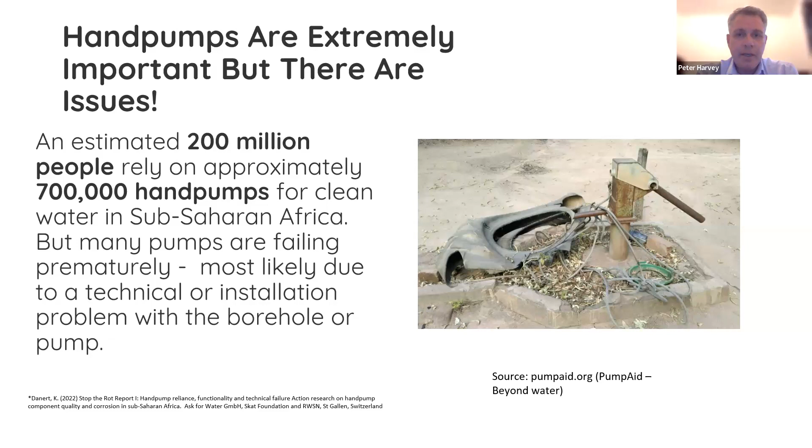And the idea of the Stop the Rot initiative was to document the scale and extent of rapid hand pump corrosion, as well as the use of poor quality hand pump components in Sub-Saharan Africa, and ultimately, therefore, to bring about actions to address these specific problems.

Now, the issue of corrosion and poor quality components are interlinked, and overall they contribute to poor hand pump performance, rapid failure, poor water quality, and often resulting in either hand pumps not working and abandonment of those sources, or long periods of downtime where users are unable to access water through the hand pump.

So this is not a new issue. We've known about these issues for many years, but it seemed that it had come off the agenda, and that we were talking about the social aspects of community managed water supplies, for example. We were talking about the systems and services that were required to ensure that hand pumps keep functioning. But the technology piece of it sometimes got put to the background.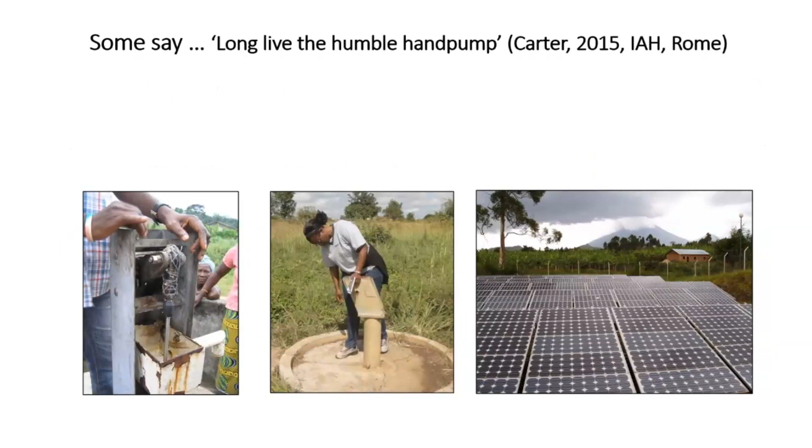In 2015, I presented a paper at the International Association of Hydrogeologists conference in Rome, entitled Long Live the Humble Hand Pump. I drew attention to the view that was becoming more common, that hand pumps in rural Africa and Asia have had their day. They're too difficult to manage, and pumping should use solar energy, which is getting cheaper and cheaper, and furthermore, our ambition should be piped, treated, and household connections for everybody.

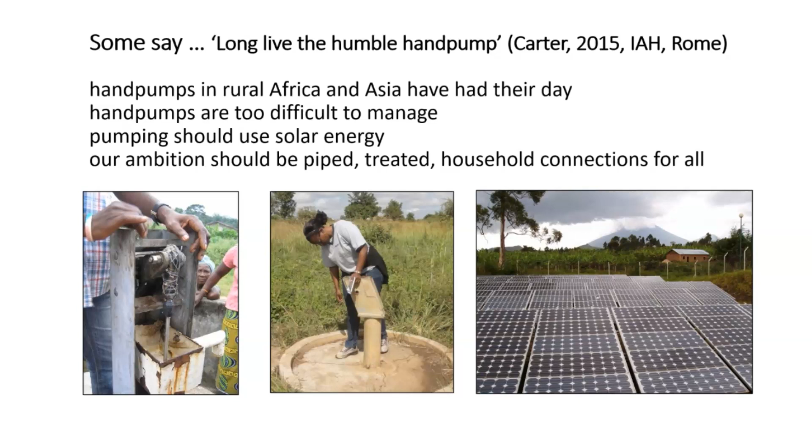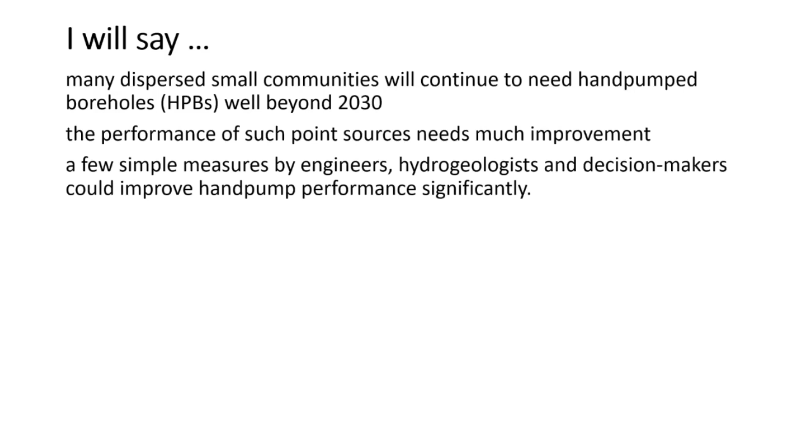Now I'm going to say something a little bit different: that many dispersed small communities will continue to need hand-pumped boreholes, well beyond 2030, the end of the SDG period, perhaps for another two or three decades even. We do know that the performance of such point sources needs a lot of improvement, but a few simple measures by engineers, hydrogeologists and decision makers could really improve the performance of hand pumps very significantly.

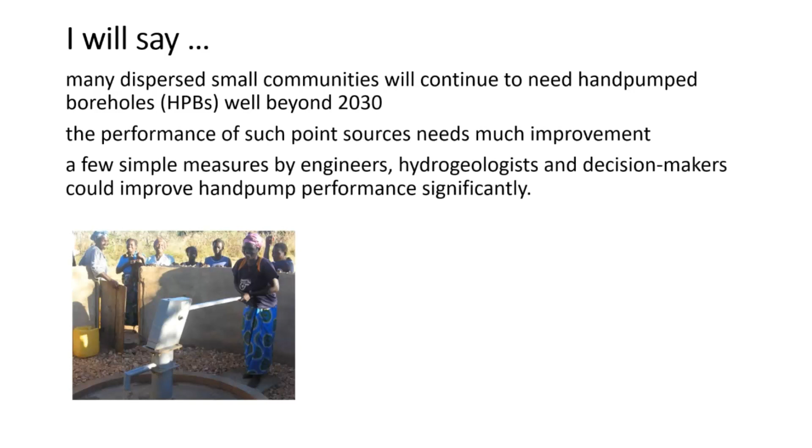A hand pump here in Zambia provides a basic water service for the community, but it is prone to breakdown. Reliability is an issue, functionality is lower than we would like to see. So we do need better pump designs and quality control of the manufacture of hand pumps and the manufacture and supply of spare parts. Of course, it's one thing to have a design, it's one thing to have better quality control, but we also need to see adoption and uptake of any improvements that are made.

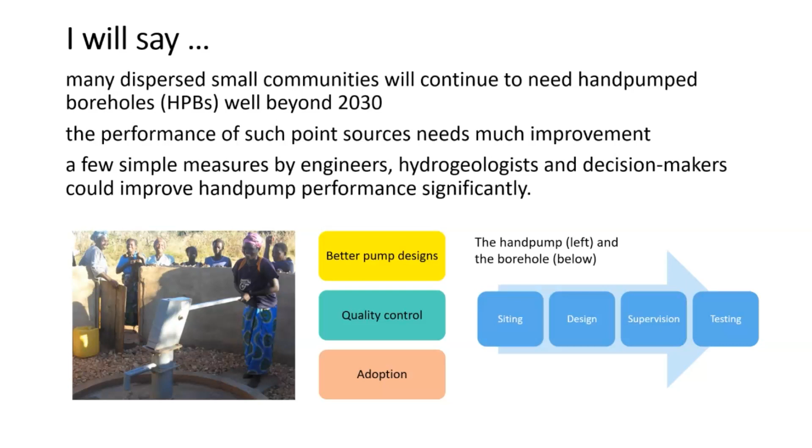And that all needs to be set in the background of improvements to the siting of boreholes, the design of boreholes, the supervision of construction, and then the completion, the testing, and so on that follow the completion of a borehole. So improvements to pump designs fit within a wider ecosystem, which involves not only the pumping technology, but also the borehole and the groundwater resources on which that borehole depends.

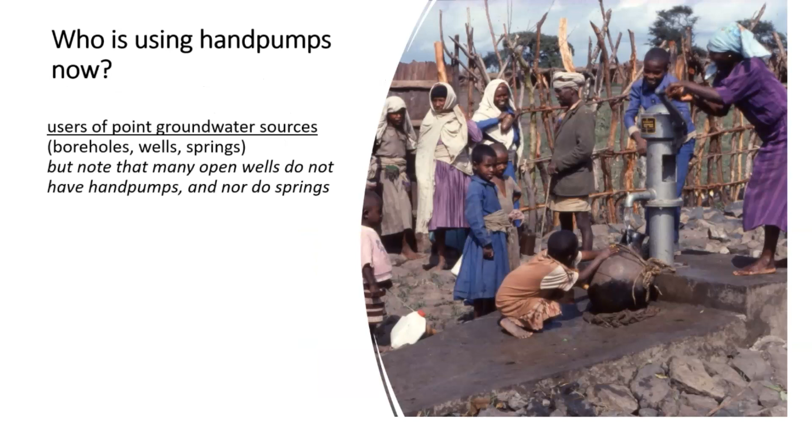Who's using hand pumps now? Well, the obvious place to start is people who use point groundwater sources. In the publicly available data, what that refers to is people using boreholes, wells, or springs. But of course, many open wells, many springs don't have pumps of any sort. So we need to narrow down the focus a little bit. Users of boreholes and protected wells, well, again, users of both those sources may include motorized pumps, and a protected hand dug well may use a windlass and a bucket rather than a pump.

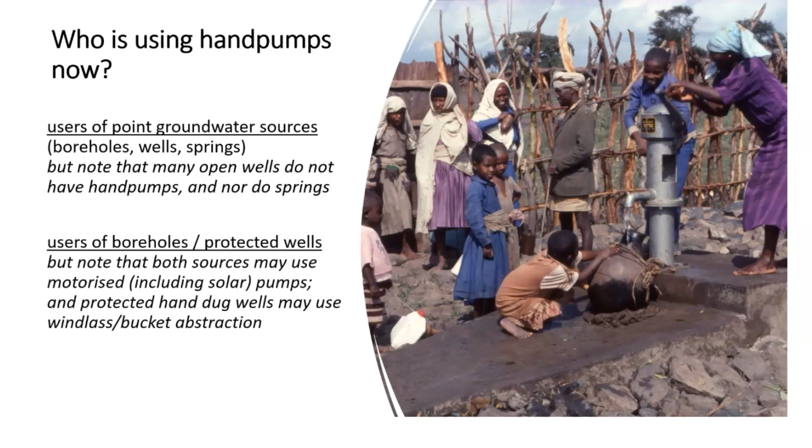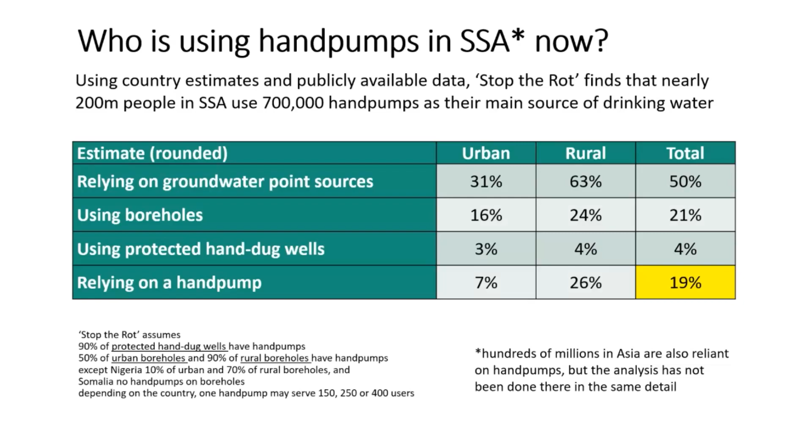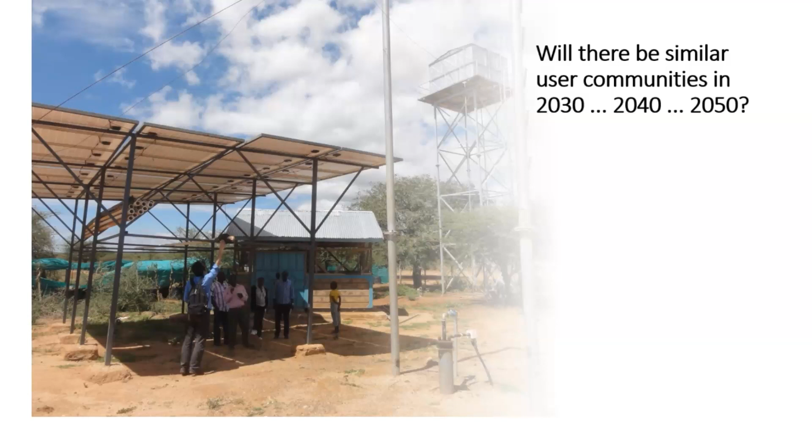Now, the question is, will there be similar user communities in 2030 at the end of the SDG period, in 2040 and beyond? Of course, there's the trend towards piped systems, treated systems, solar pumped systems, such as the one in the photograph here in northern Kenya. There are obvious issues associated with a transition to these sort of technologies, and cost and management are the two primary factors that need to be taken into account.

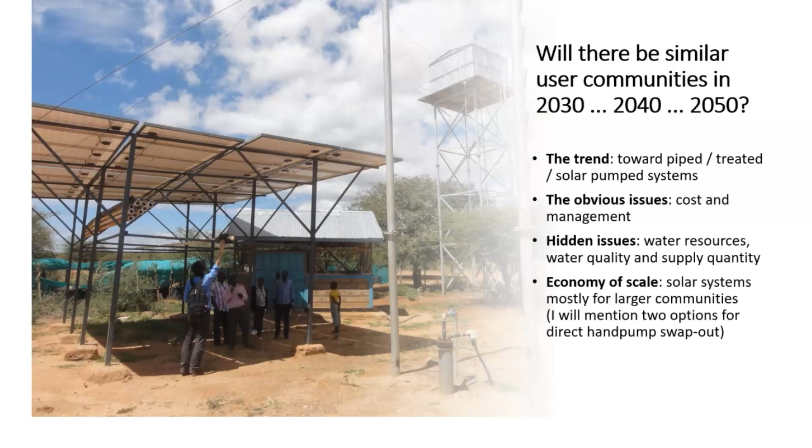But there are hidden issues too about water resources, about the consideration of water quality and supply quantities involved. There's an issue of economy of scale too. Solar systems are often most cost effective for larger communities, although in the next slide I'll mention a couple of options which can result in direct swap out of a hand pump for a solar option.

So the two direct swap out options that I know of are the Lorenz submersible pump, the PS2 100, and a more recent example, the impact pump, the SLX 40.

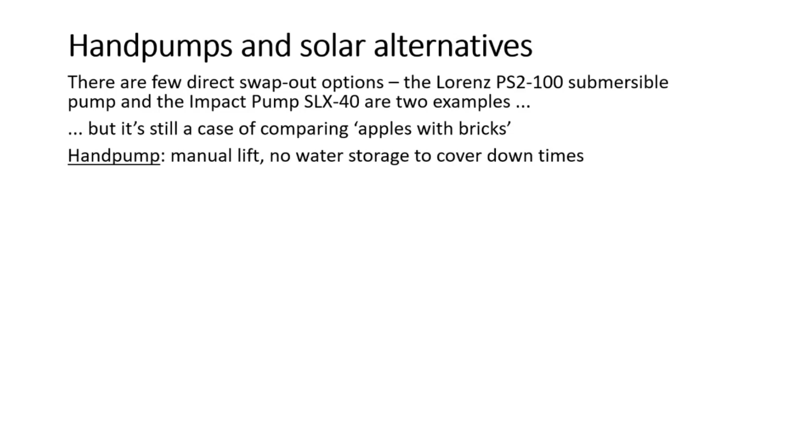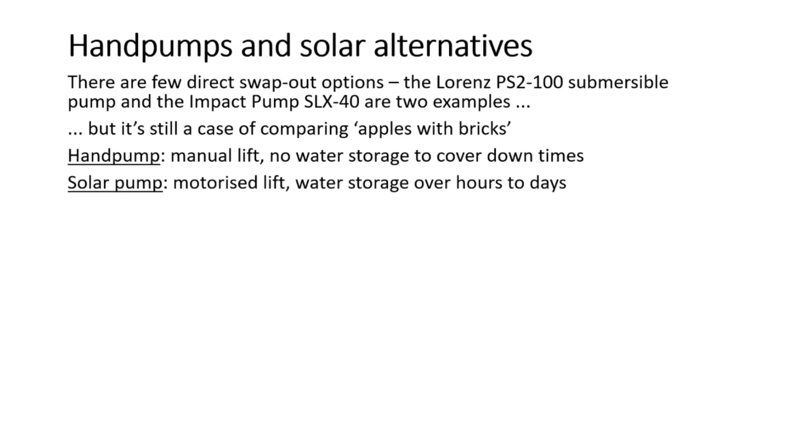But it's still, if we want to compare solar and hand pumps - one of my colleagues refers to this not as comparing apples and pears, but apples and bricks. They are so dissimilar. A hand pump involves manual lift, there's no storage to cover downtimes. A solar pump, on the other hand, involves motorized lift. There's always water storage involved, which can keep the users supplied for a period of hours or days, depending on how big that storage capacity is. The Lorenz system is a small submersible pump, but with some smart technology which enables electronic payment.

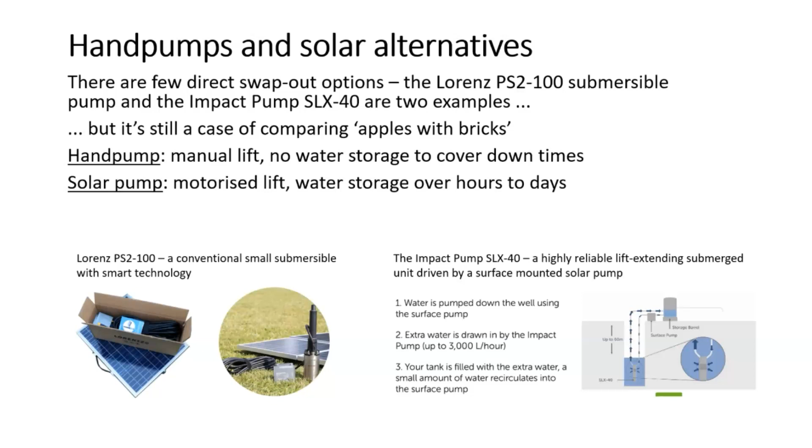The impact pump is a very different kind of technology where the big focus in the design of the unit has been on reliability. It's based on the hydraulic ram principle, and in effect it's a lift extender driven by a solar pump at the surface. So it brings all the

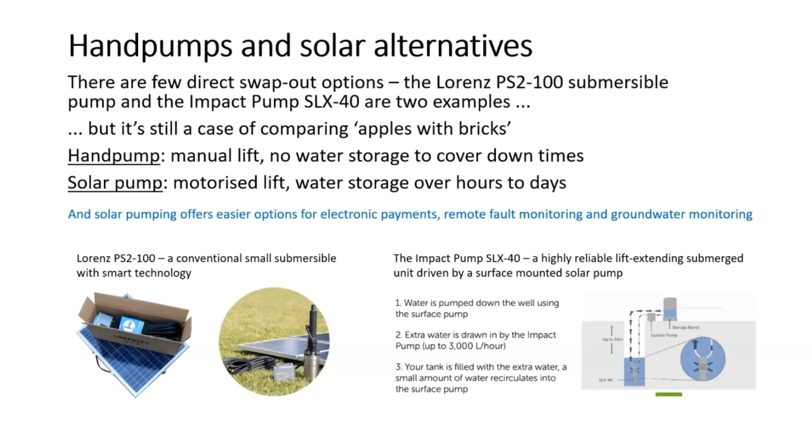challenges of repairs and maintenance to the surface rather than down the hole components. Solar pumping, of course, offers easier options for electronic payments, as well as remote fault monitoring and even groundwater monitoring of water levels and water quality.

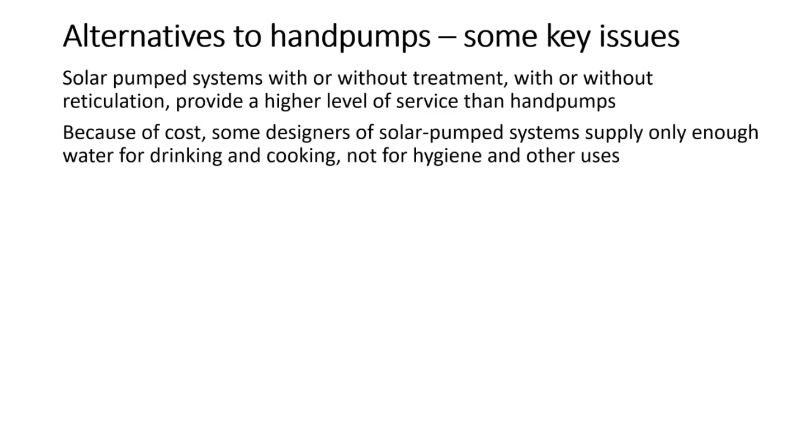There are some issues. I've already alluded to the fact that solar pumping systems provide inevitably a higher level of service. But because of cost, some designers of solar pump systems design for only enough water for drinking and cooking, and

not for the larger amounts of water that are necessary for hygiene and other domestic uses. And there is an issue around the possibility for aquifers to support higher abstraction rates than hand pumps.

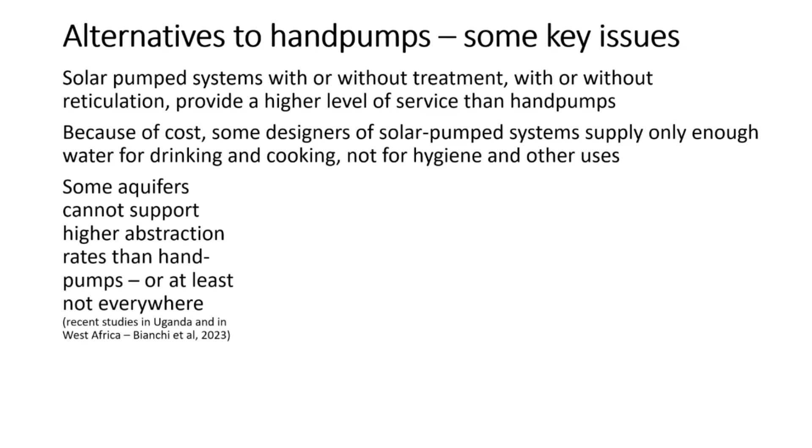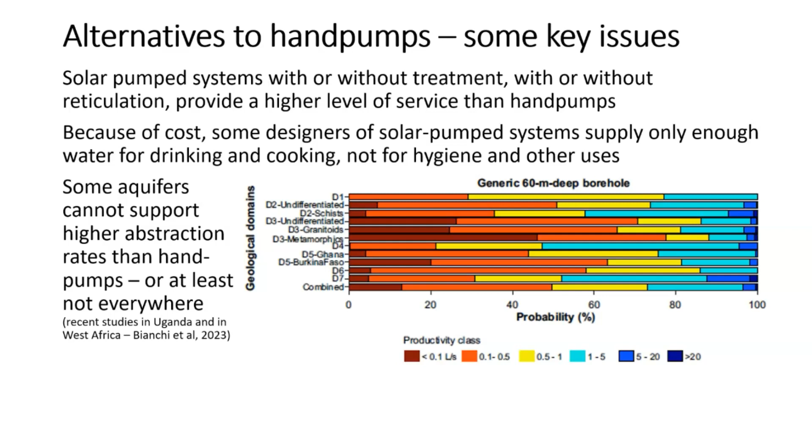There is a point here that's important, and that is that we can't look at the comparative costs of hand pumps and solar in isolation from the likely revenues and the effectiveness of the management arrangements.

And usually if a hand pump were to be swapped out for a solar alternative, then it's not just a matter of changing the technology, but there would be a much greater focus on revenue collection and on professionalized management, which is necessary for the solar option, but which may also be more effective in terms of functionality and reliability.

So although the real capital and recurrent costs of solar alternatives are significantly higher, a related issue, it seems, is that consumers are much more willing to pay for the higher level of service that they're likely to get from a solar system.

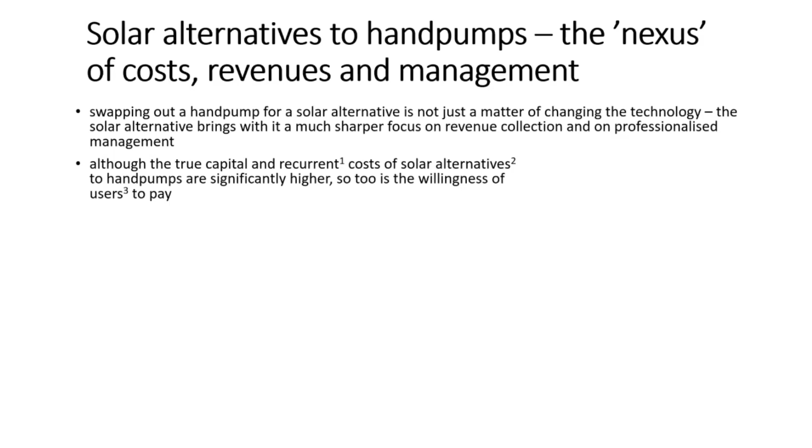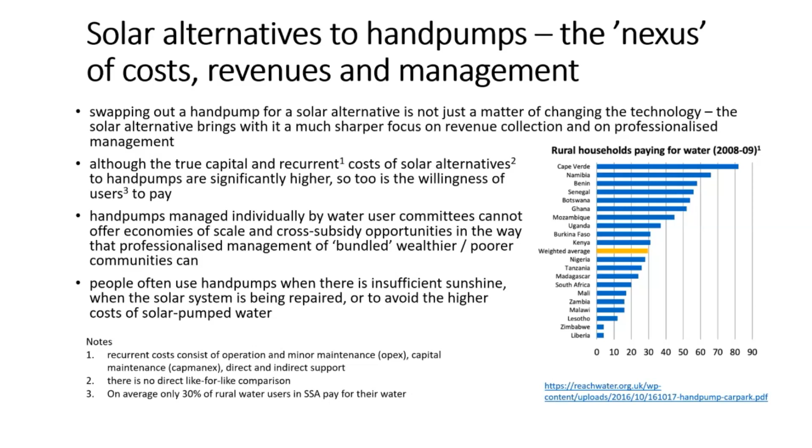In thinking about alternatives to hand pumps, the leave no one behind principle is important. And you may be wondering from what I've said so far whether I'm in favour of professionalised solar pump services in which users pay a reasonable tariff. And the answer is yes, but it's a yes but.

Out of sub-Saharan Africa's 635 million rural people, 200 million, as we've seen, are served by hand pumps, which often fail, which break down regularly. And there are another 146 million using unimproved sources, that is, open wells and so on, or open water, and some of them could be served by hand pumps too.

There may be even larger numbers in Asia. We just don't have the analysis of the data at this stage.

Some of the reliability challenges of hand pumps have been known for a long time. The Design Outreach project, which is the focus of this webinar, aims to address some of these.

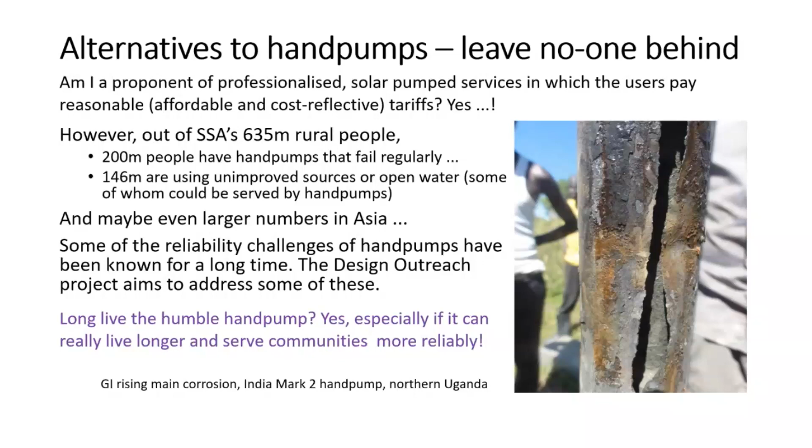Thank you very much to Richard for, I think, a very clear presentation and really making a case for why we do need to consider hand pumps, not as a standalone solution, but as one solution amongst many, including more advanced technologies. Thank you to Richard.

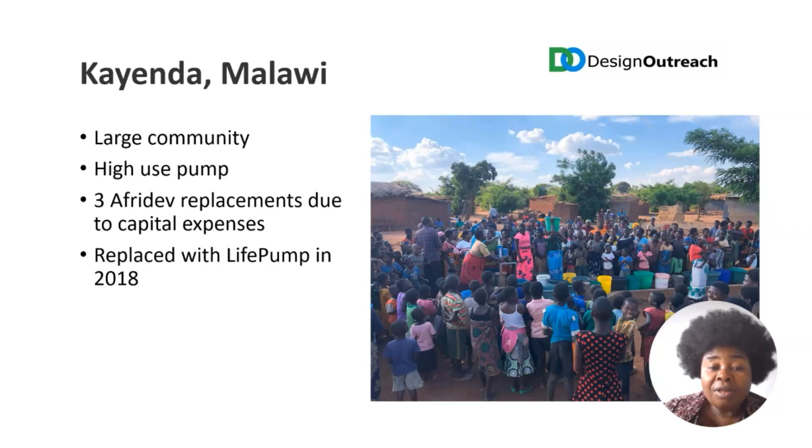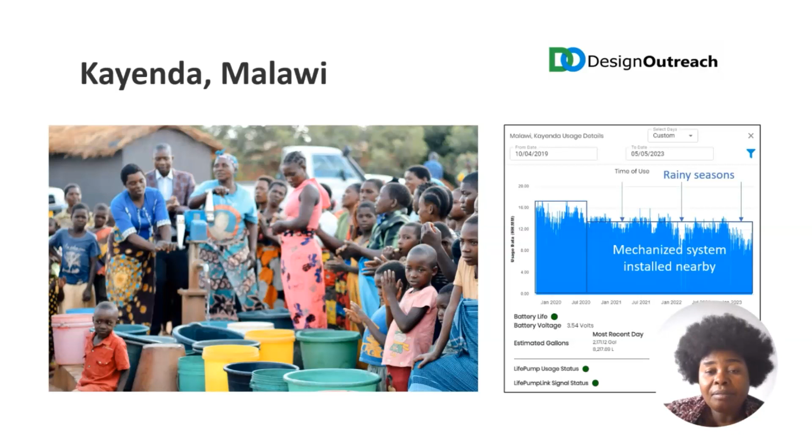The next community I'm going to talk about is called Zolomondo, in Kasungu district in TA Chulu. This pump also had prior installations before the LifePump. There were also 3 AfriDevs used in the same place, and it was the same story of frequent breakdowns, until the community resorted to using a shallow well, which was contaminated with dirty water. They had no other option. There are so many stories where communities would leave very early to try to find water, which was not even good water at all, until the LifePump came on board.

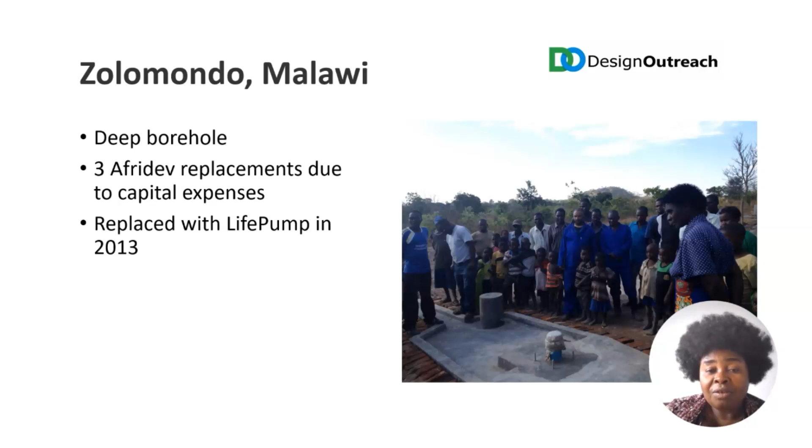This is the first pump we have in Malawi. As we can see from the data, the pump has been used for the past several years - unfortunately the data links were only installed for about 3 or 4 years, but this pump has been there since 2013, and there is no history of breakdown at all. The communities are very excited, and there has been so much social development happening in this community.

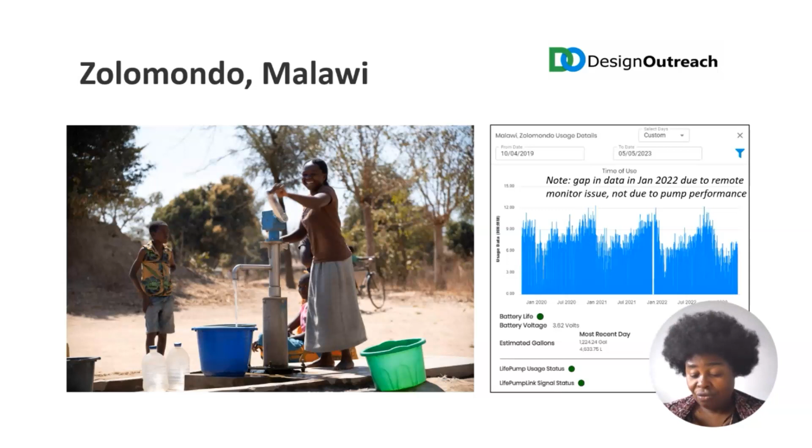This is a very dry area, and right now people are having vegetable gardens. They are raising pigs because they have water nearby. So there's quite a lot of impact because the water has been consistently supplied throughout the year for the past 10 years, and this is all attributed to the impact of the high quality hardware parts, which is directly related to reliable water supply in this community.

The last one I am going to talk about is Ntenje. Ntenje community is also in Malawi. What is interesting about this community is it is in the peri-urban area of Lilongwe City, and this is a large community as well. Over 1,800 people had been using the AfriDev in this place.

Unfortunately, there have been quite a lot of vandalism of AfriDevs, and also non-functionality due to capital expenses. The government had consulted us, that was the headquarters, to say if we could put a pump which has reliable hardware, which is the LifePump, in this place so that there is no vandalism anymore.

So we have seen a lot of success stories from the health personnel stating that diarrhea among children has drastically been reduced in the nearby health facility because of the provision of this pump, the LifePump, and this is all because this pump is high quality hardware. One, it cannot be vandalized, and secondly, it has the impact of providing reliable water supply to the communities, which directly also impacts on their health as well. Thank you.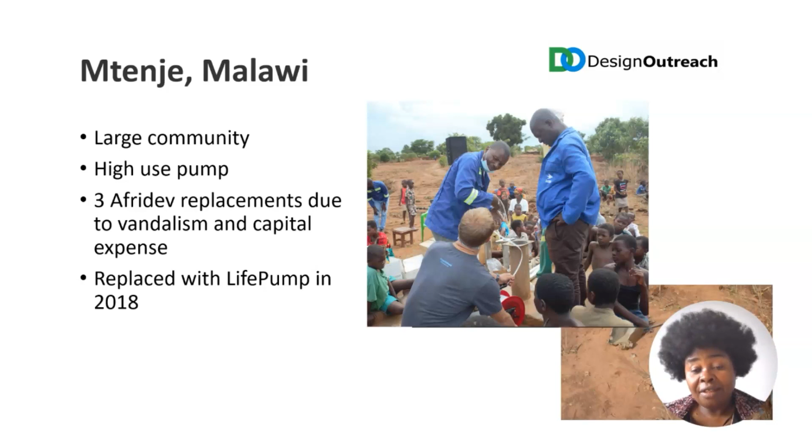So thank you very much to Beatrice. I think, again, a very clear and succinct presentation, which really outlines the importance of technology, and that technology does have a role to play.

So in this particular case, they were looking at one pump, the life pump, which is not a public domain pump, which we're looking at through the Stop the Rot initiative. But nonetheless, it shows that if we can improve the reliability of hand pumps and their resistance to issues like vandalism and poor functionality, then we can have a massive impact on communities and their lives and their health and well-being. So I think it's a nice example. There's 3 case studies of where we see that technology and improving hand pump technology can have a positive outcome.

So now we'll move on to the presentation from Michael Cook from Design Outreach, related to the current project. He'll also give an overview of the reliability questionnaire and the results that have come out of that so far, and there will be some specific questions that we'd like to put to you in relation to this particular project at the end. But over to Michael for now. Thank you.

Hello and good morning, or good afternoon, or good evening, depending on where you're dialing in from. My name is Michael Cook, and I'm the Design Outreach Project Lead for the India Mark II and AfriDev Handpump Upgrade Project, also the R&D Partnerships Director for Design Outreach. So I'm hoping after enjoying the last 2 talks from Richard and Beatrice that you are convinced of the importance of hand pumps, that you're convinced of the need for greater reliability of these public domain hand pumps, and also that hand pumps will be needed for a very, very long time.

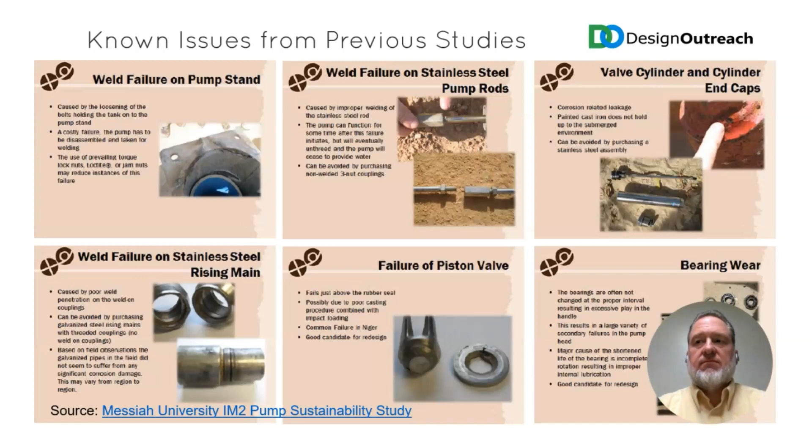So the design challenge for this project is to firstly improve the repair interval on fast wearing parts from 6 months to an average of 2 to 3 years. Also ensure that expensive parts that require major repairs last 10 plus years - in some cases, they should last 20 years. Also eliminate corrosion from pipes and excessive lead and iron from water. And then advocate for the update of the IM2 and AFRIDEV standards.

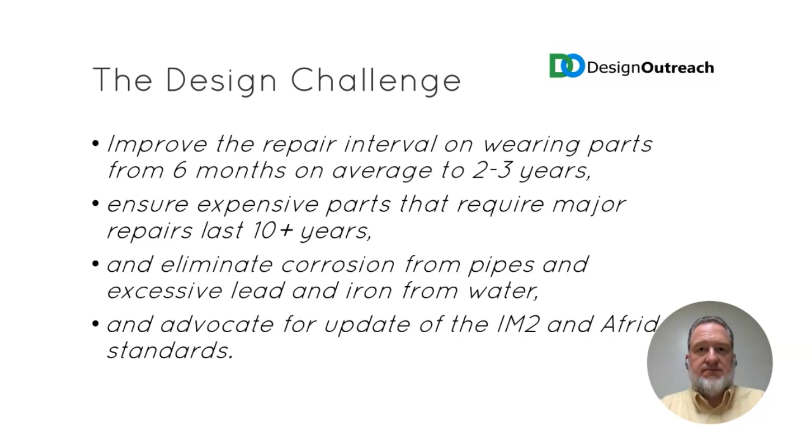Although there have been many studies done over the years, we wanted to gain a fresh perspective from the field. So we recently launched a hand pump reliability questionnaire, and many thanks to those on this webinar who have already responded - we really appreciate that. Our goal of this questionnaire is to get a better understanding of the failure modes and what specific hand pump components are contributing to early failure, and also to set up project priorities, and we really appreciate your help.

So I'd like to soon show you a sneak preview of the initial data we've had so far, which does show early failure of certain components. I'd like to draw attention that we have heard from 26 different countries, which is phenomenal. But I'd also like to draw attention to the fact that most of the responses are from Malawi and Zambia, where we do have Design Outreach team members who have been expediting the questionnaire responses. So that means we're skewed heavily toward AFRIDEV.

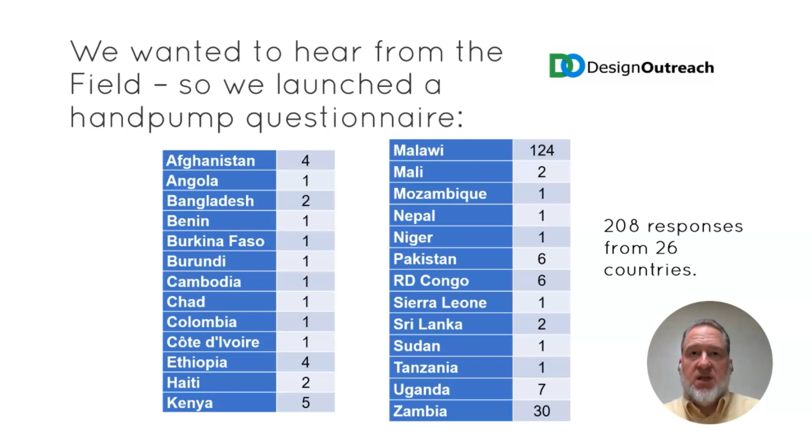And we really want to get more responses, not only for India Mark II and III, but from other countries that use AfriDev as well. So we really would like your help for that. Please keep in mind that this data is limited in response quantity and geographic location, but

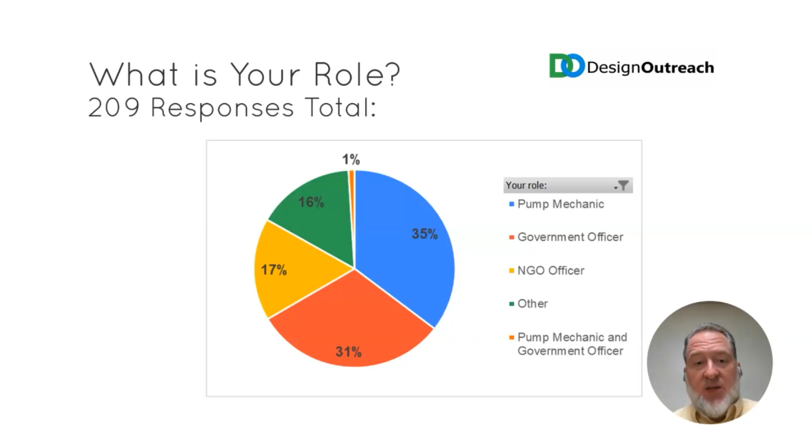we did want to show you this early data, which does reveal some surprising results. So far we've received over 200 responses to the hand pump questionnaire, and from the results compiled so far, we can see that 35% are pump mechanics, 31% are government officers, 17% are NGO officers, 16% are considered other, and then 1% have a combined role of pump mechanic and government officer.

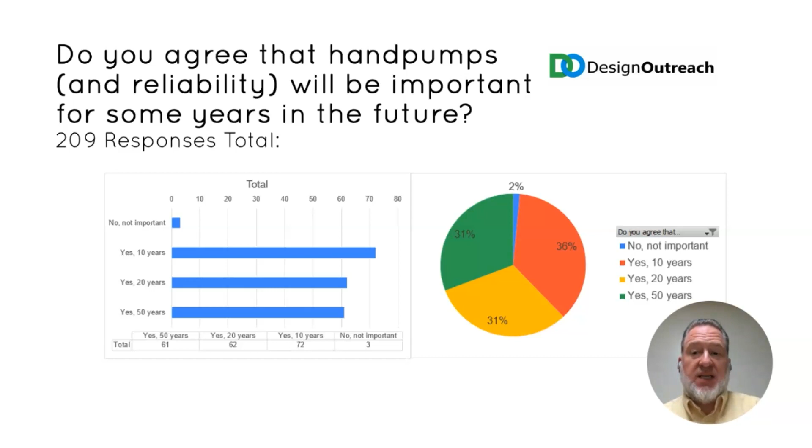Then we ask the question, do you agree that hand pumps and reliability will be important for some years in the future? Interestingly enough, the results from our questionnaire correlate very well with Richard's talk about the need for hand pumps long into the future, even though newer technologies are ramping up. So the average view is that we're going to need them for over 20 years, and 31% of respondents believe hand pumps will be needed for 50 years in the future.

On this slide, you can see that with the data we've compiled so far, we have 133 responses from AfriDev and 36 related to India Mark II and III. And you can see the average pump depth is very similar, 38 meters for India Mark II and III and 35.8 on AfriDev. We do want to get more responses, especially on India Mark II and III, so we can have statistically significant data and be able to really have a clear picture of what is going on in the field.

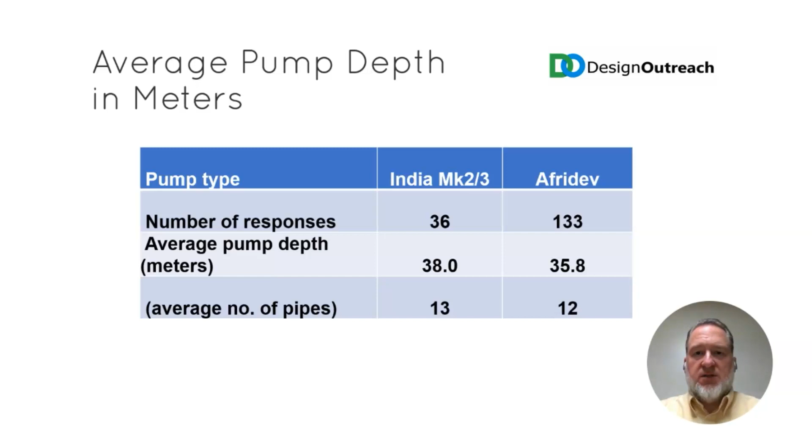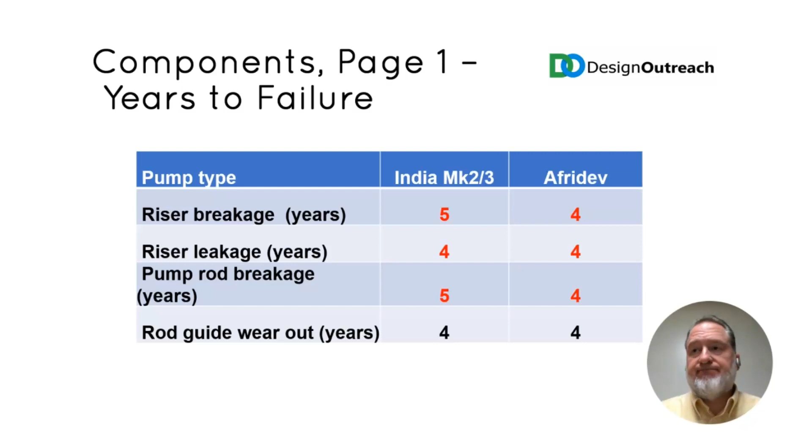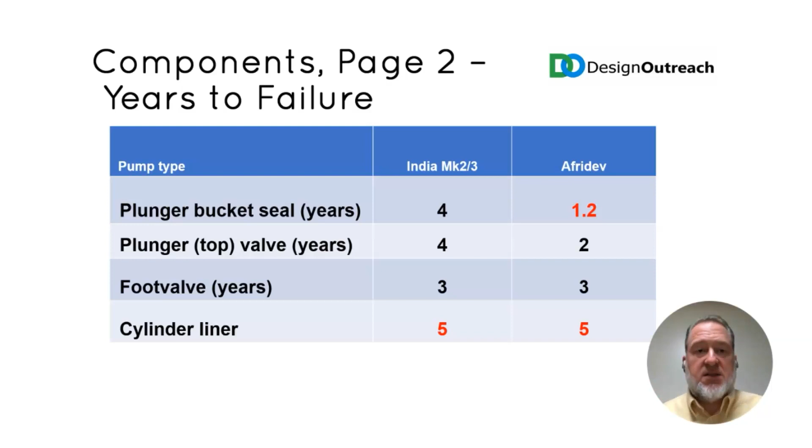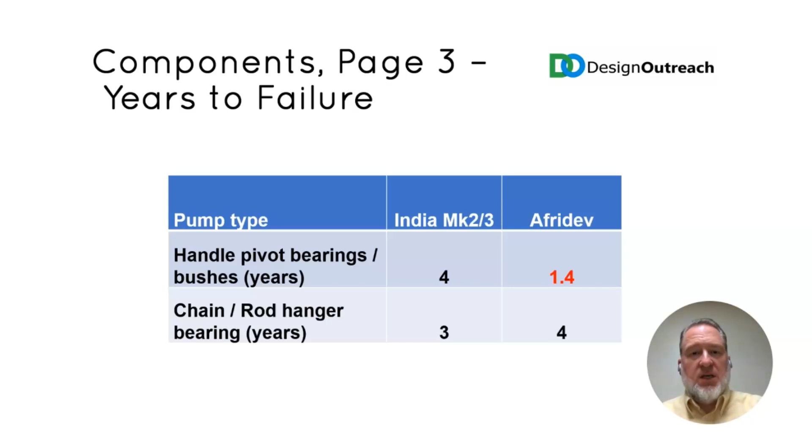Now we're looking at handle pivot bushings or bearings. On AfriDev, those are failing at 1.4 years according to our responses. That's very quick - that's a very quick failure, and it does provide an opportunity for design improvement.

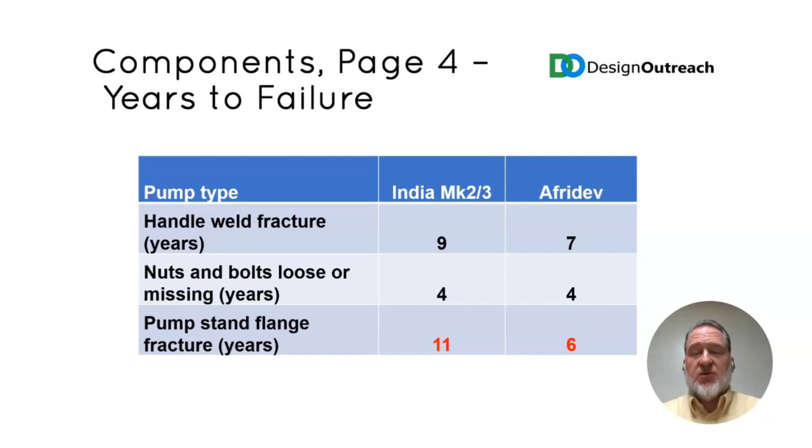Okay, on this slide we show handle weld fracture, 9 and 7 years for India Mark II and AfriDev. Nuts and bolts loose or missing, 4 years for each. But look at what stands out on this slide - pump stand flange fracture, 11 years for India Mark II, 6 years for AfriDev. Now we were a little surprised because we've heard that the issue was more prominent on India Mark II, but the survey shows AfriDev is actually worse for pump stand flange fracture. This is very expensive work, as you know - this is like civil engineering work where you break up the concrete to reinstall the pump base. So these really should last much longer.

This hand pump failure mode data that we've just discussed, with average years to failure for each component, even though it's preliminary data, it certainly indicates there's room for improvement on multiple components. This initial data, along with previous studies by other individuals and organizations, shows the need for design improvements as well as improvements with the supply chain and quality control of hand pumps and their components.

However, we need more data, and we need your help to get that data. Even though this questionnaire so far has a little over 200 responses, with the average person representing about 100 pumps, that means this questionnaire represents around 20,000 hand pumps. And yes, even though that seems significant, keep in mind that most of these results come from 2 countries. Not only that, we only have 36 responses that were specifically India Mark II and III. So we need to get more data to have statistical significance with our decision making.

And if you think about it, there are countries like India, for example, that have millions of India Mark II hand pumps. If you have a contact in India or other countries, please reach out and share the news, and cut and paste the link that's attached to this webinar from the list of useful links and send them to your colleagues. Thank you in advance for your support.